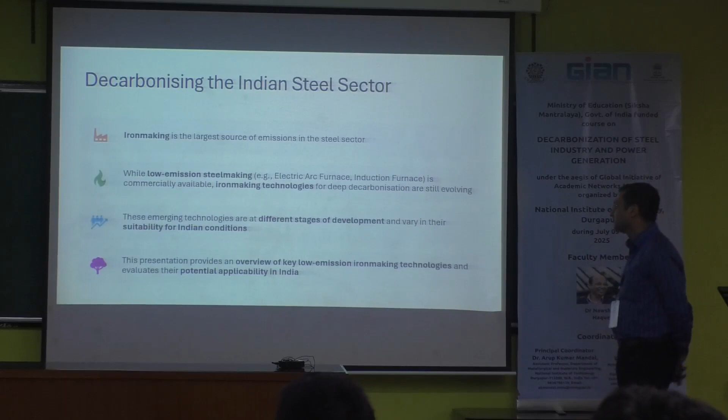In the steel production value chain, iron making is the most emission intensive step. Low emission steel making through electric arc furnaces promises a low emission route using scrap, but low emission iron making technologies are also required. These technologies are at different stages of development—some at very high TRL levels, some low, some at lab scale. In the long term, we can expect a few technologies to develop and become commercially viable. This presentation will give you an overview of these technologies.

Then the Ministry of Steel initiatives—I think we covered this in previous slides in much more detail.

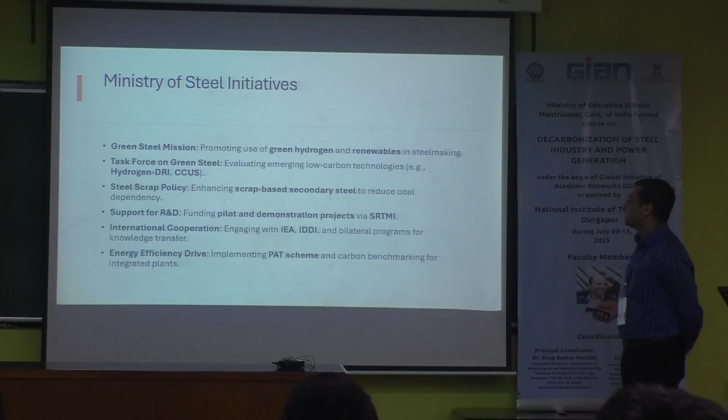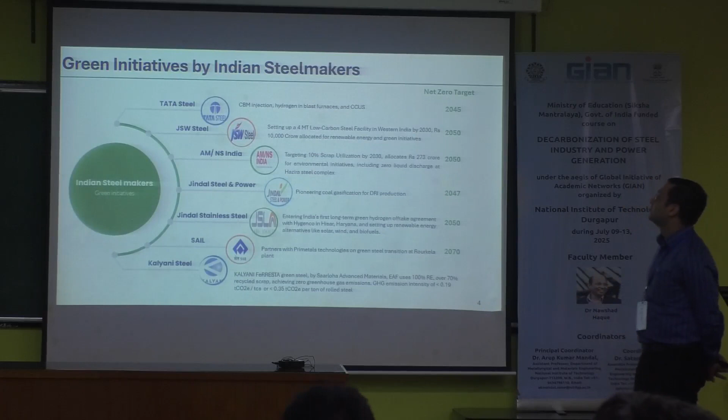There are various initiatives by Indian steel players. Tata Steel: CBM injection, hydrogen blast furnace, net zero target 2045. JSW Steel: 4 million ton low carbon steel facility by 2030, a large allocation to renewable energy, target 2050 as per public domain. AMNS: targeting 10% scrap utilization, 273 crores allocated for environmental initiatives, net zero target 2050. JSPL: coal gasification for DRI production, a unique plant, targeting net zero by 2047.

Jindal Stainless Steel (JSL) has set up the first green hydrogen-based unit at Hisar and is aggressively looking at renewable energies by 2050, aiming to become net zero. SAIL has declared net zero by 2070 as per national targets. Kalyani Steel has made a very low emission intensity steel using scrap and renewable energy—their products are FeRRESTA and FeRRESTA Plus, developed for the international export market, with higher returns.

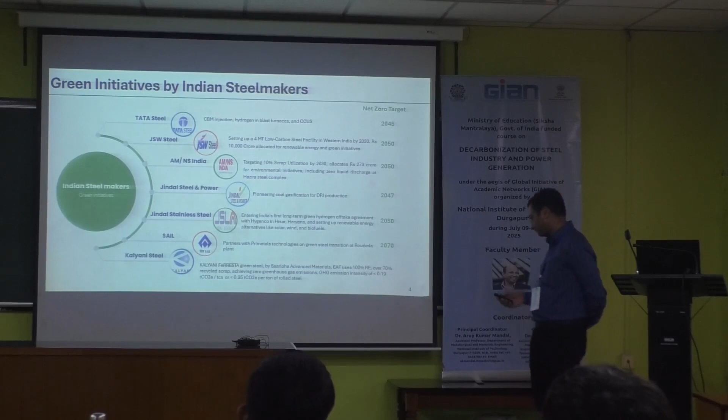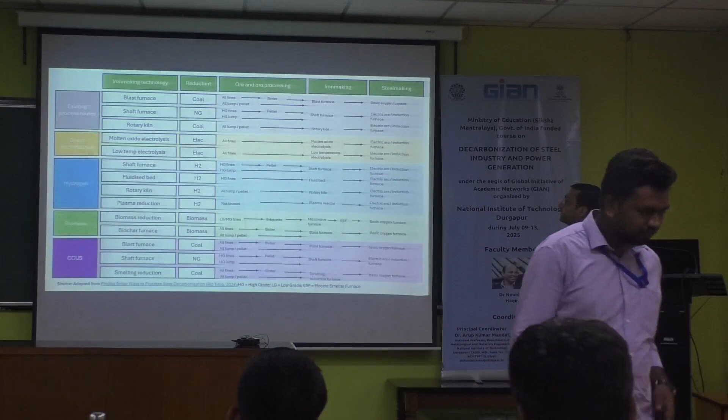This is the summary of the technologies in my presentation. The existing process is blast furnace through shaft furnace, basically natural gas based routes. Rotary kilns, coal-based DRI plants are prominent in the eastern region and in the Bellary region in the south. Then direct electrification—TRL levels are low—molten oxide electrolysis and low temperature electrolysis. Some companies like Electra have developed low temperature electrolysis, but it's not yet at commercial scale. Then hydrogen shaft furnace, fluidized bed, rotary kiln, plasma reduction.

These have been discussed in detail in previous sessions. Biomass based reduction and biochar furnace are at high TRL levels in some countries like Brazil, where they use biochar at large scale for iron and steel production. CCUS has demo scale plants even in India. Shaft furnace based NG—again in India there is an example, JSW owns that. Smelting reduction with coal and CCUS going forward also provides a promising solution for low carbon iron production.

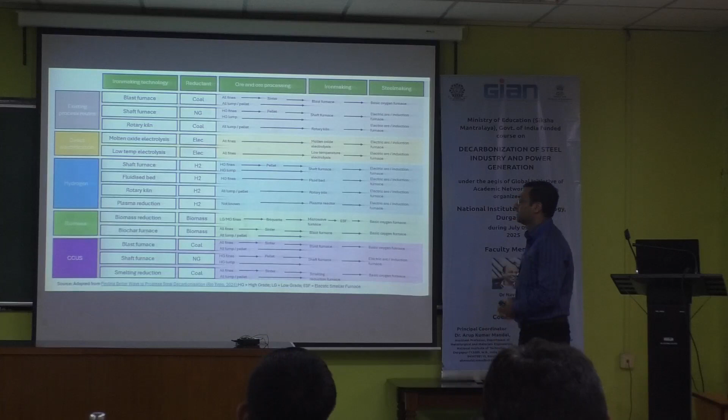Here are the ore and ore processing requirements for these processes. In iron making, what reactors or furnaces are anticipated or being used? Then in steel making, what kind of furnaces will be required—maybe the existing BOF route or electric arc furnaces.

Technology readiness level: concept, initial idea, application formulated, and concept validation. Then small prototype is 4, large prototypes are 5 and 6, demonstration scale is 7 and 8, early adoption is 9 to 10, and mature is 11.

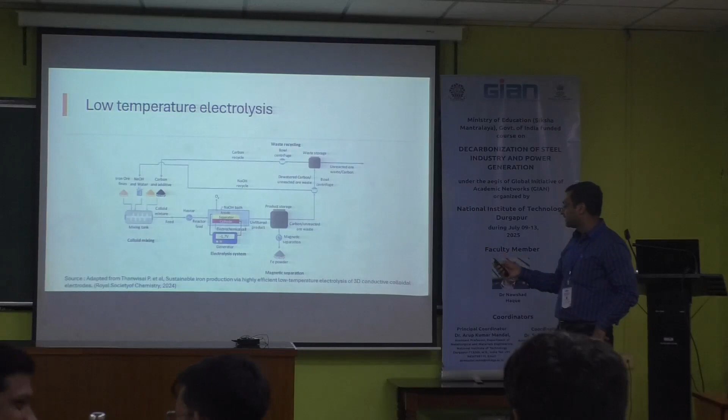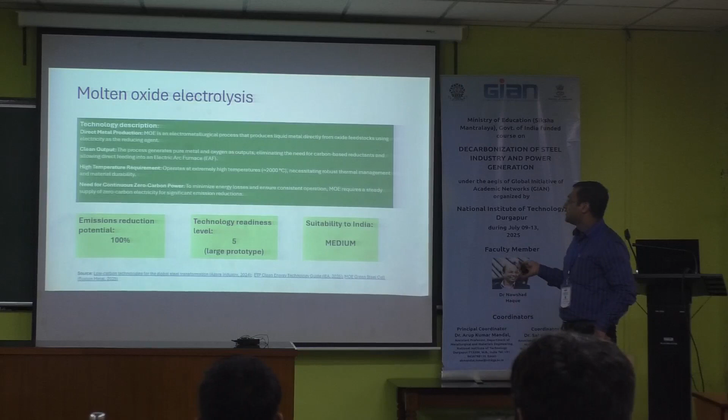Do we need to discuss these? No, not really—these are just for reference. You may see molten oxide electrolysis at TRL 5. Suitability to India is medium because of various factors, scale of production being the main one. Low temperature electrolysis is at early large prototype stage; suitability to India is medium, not that high.

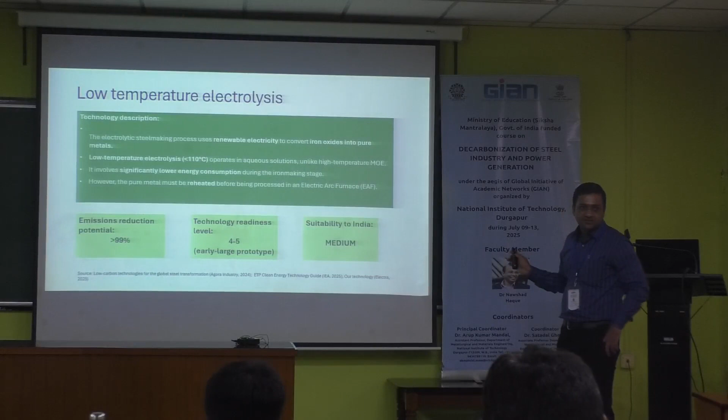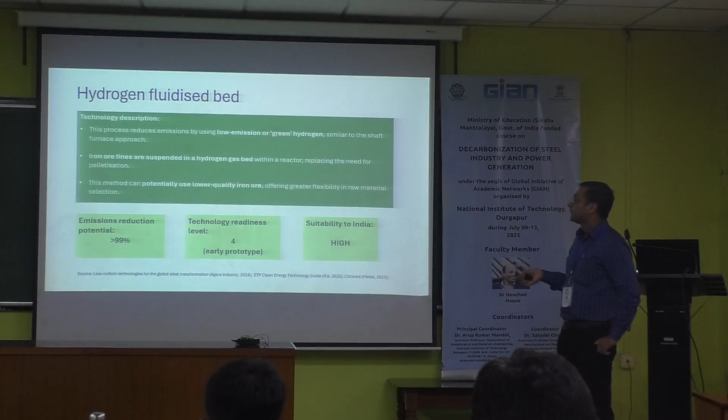Hydrogen shaft furnace—suitability is high considering Indian conditions. Then fluidized bed—suitability is also high, early prototype stage exists, and emission reduction potential is also high.

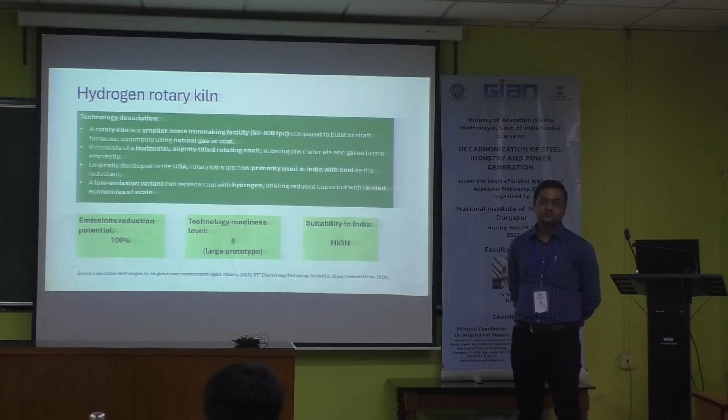Rotary kiln is something new—a new concept especially for replacement of small coal-based DRI units. This small furnace is under implementation in Namibia, and the plant is under commissioning and will start soon. The maximum capacity anticipated for this rotary kiln is 800 TPD, but the existing project I'm talking about is a 50 TPD kiln, and its structure is also different from what we see in general coal-based DRI units. It has a heating mechanism, and then hydrogen is injected—electricity requirement will be higher since you normally heat the raw materials. Suitability is high because it may require low capex and will be suitable for various needs in India.

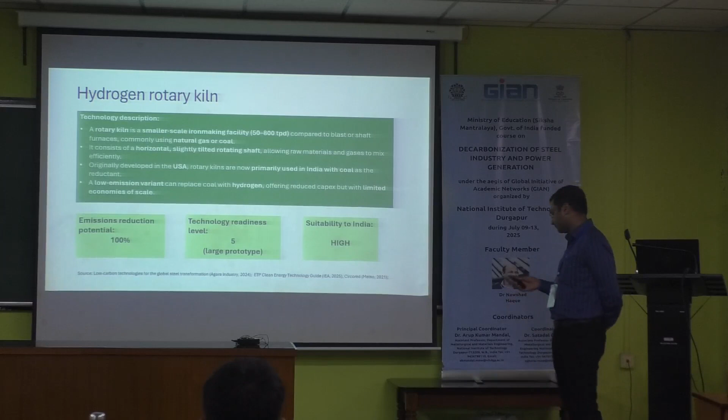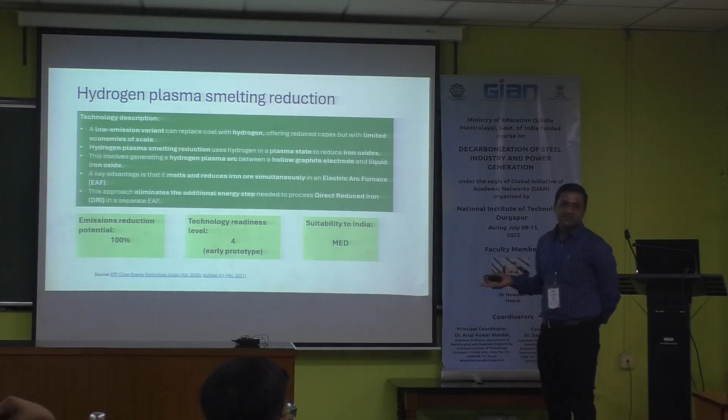Then biomass based reduction. Although we produce a lot of biomass in India, the challenge is getting the aggregation of the biomass and suitability for the steel industry. These are the two main factors. Although power plants also have a mandatory obligation to use biomass, they are not able to meet the requirements, but government is still hopeful of aggregating this biomass and finding suitable biomass for specific industries.

For example, iron and steel requirements may be met by bamboo. But bamboo availability in this region may not be that high, so if we transport it from the northeastern part of the country, the cost will be high. The government is trying to matchmake biomass available in the local region with industry so that it can be available sustainably. That's why suitability is medium.

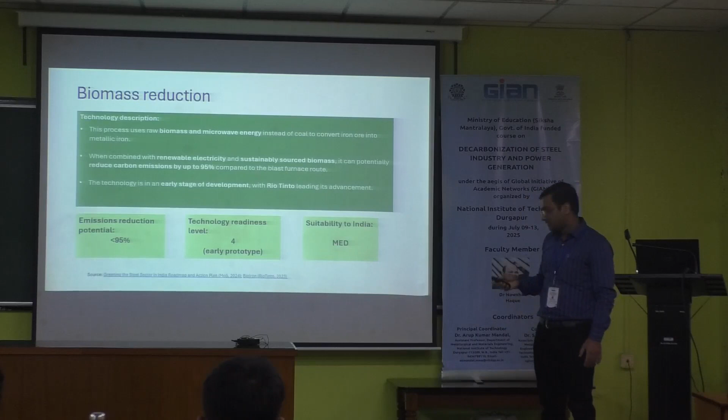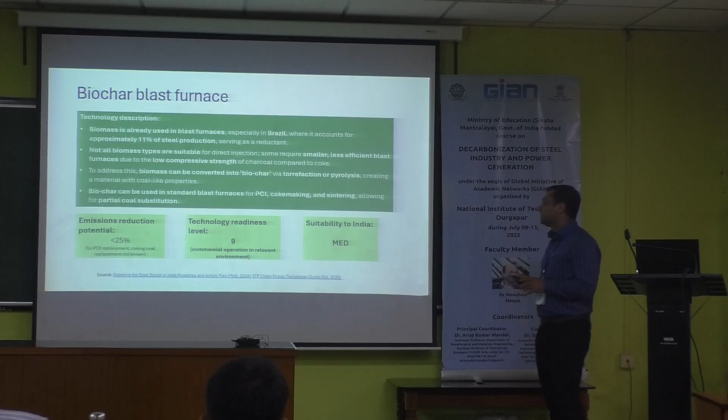But yes, some operations can have biomass as a raw material, and biochar in the blast furnace. Brazil is using a lot of biochar in their small blast furnaces as PCI, as well as a bit of biochar in coke making. Industry experts say some blending can be done in coke making, in PCI, and some coal can be replaced in sintering too. Suitability is medium, technology readiness level is 9.

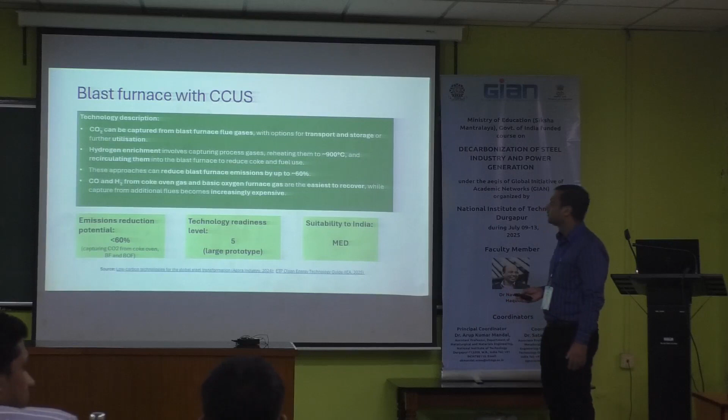We will have to capture, let's say, a blast furnace producing 10,000 tons of hot metal per day. The carbon capture requirement will be huge, and those plants require a lot of energy for capturing carbon. The carbon produced, either in liquid form or as dry ice, keeping it in that state is also difficult. So let's see how things develop.

The 100 tpd or 5 tpd CCU unit in Jamshedpur is not enough. And on the consumption side, we are also not able to match-make CO2 producers with CO2 consumers. Although demand is there, matchmaking is required.

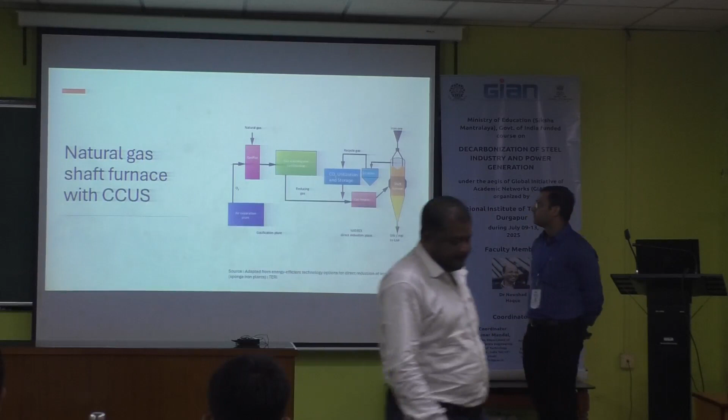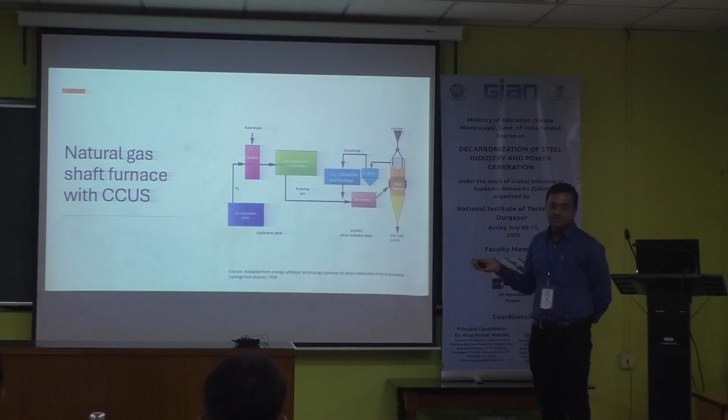The natural gas shaft furnace with CCUS - whatever gas comes out of the shaft furnace can be captured and utilized. I think that's what JSW is doing at the Salem plant. It's about hydrogen, not natural gas, in the existing plant. Okay, the existing plant has already got hydrogen going into HDR. So from where is this carbon captured? There is no carbon capture. There is no carbon emission. We are talking about hydrogen DRI.

In the existing facility, there will be a few more modules added which will make it 4 million. That is fine, sir, but JSW has published that they are capturing 100 tons of CO2 per day, and it is being utilized in beverages. I have no idea. What I know is it's a HYL technology-based plant in which natural gas is used, and CO2 is captured, then bottled and sent to bottling plants for beverage bottling.

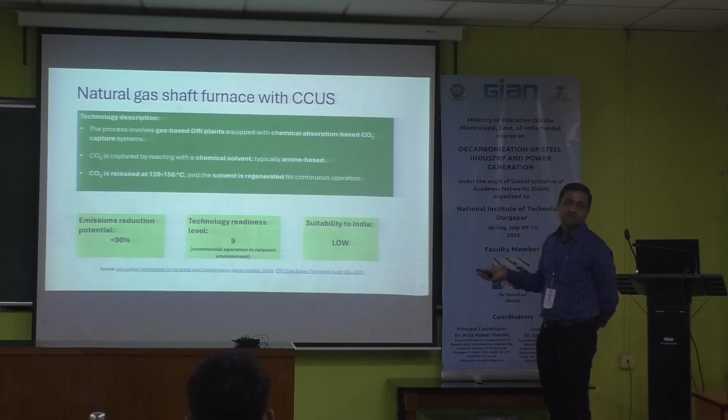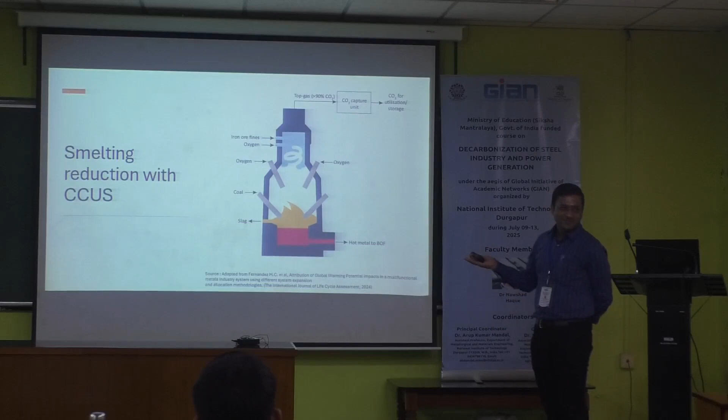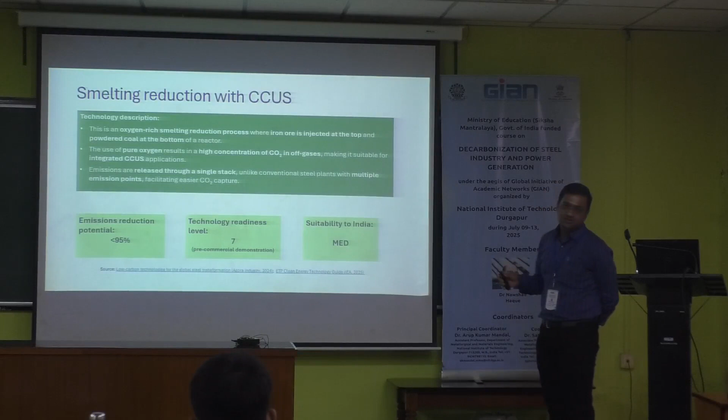Then we have to scale up the priority technologies which have high suitability to India, with mid to long-term R&D focus required. I think the government has taken steps in the right direction, but more incentives or policies are required for enabling this R&D and developing Indian technology. Then electrolysis innovations will be an ultimate step where we can reduce energy consumption, and our challenge of low-grade iron ore will also be catered to by these electrolysis innovations.

Then biomass reduction is a short-term measure, but as we discussed, a lot of effort is required for biomass producing areas and consumption centers. Then CCUS integration needs evaluation - whether it is in favor of the country, in favor of producers or not - that also needs thorough evaluation. That's it from my side. If you have any questions.

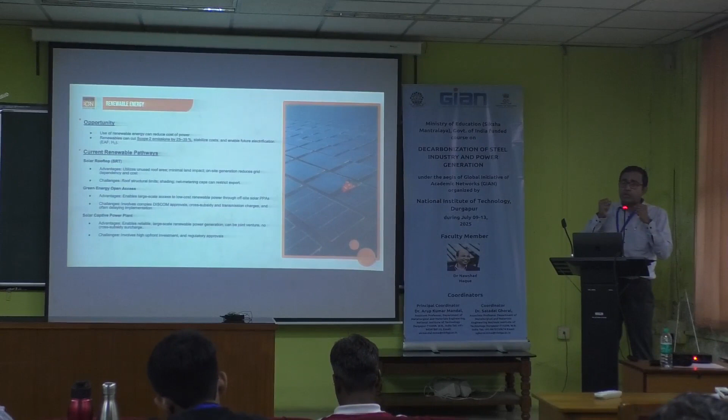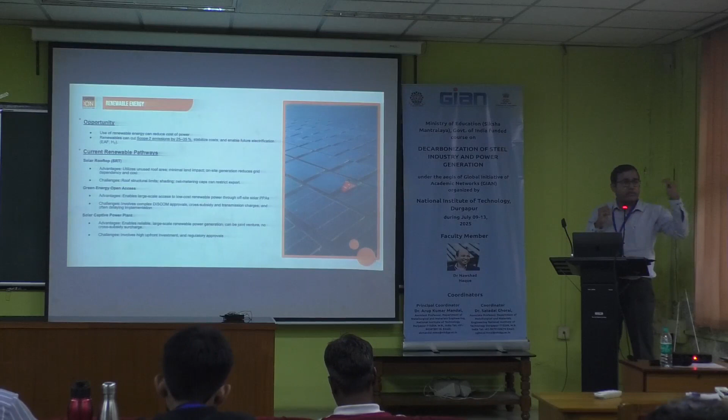But the problem compared to the net metering method, the BTM method, is that if there is extra power generated compared to what you consume at that point of time, you lose that power altogether. In net metering method, that power goes to the grid as if it is banked, and when you need that power, you can draw it back. Here, you lose that power. So comparatively, BTM is not that attractive compared to net metering method.

So overall, problems related to renewable energy today are: the net metering method is not very standardized. For solar rooftop, as well as for captive, as well as for behind the meter, it's capital intensive. Then there might be site constraints, roof space, land space that might be constrained. There may be shading problems. Then, in any case, you need a grid backup, because at night you need grid power, and whenever there is fluctuation you need grid power, and that backup has a cost.

Then there are technical gaps, because in the steel industry, the employees and specialists over there are experts on steel, not on power. So that knowledge gap comes in, but of course one can outsource the entire work - that will also have a little bit of cost.

In this case, one needs to look also at the ESCO model, wherein the third party invests for the renewable energy, and on the basis of savings, whatever is the saving, it's shared between the two parties - a win-win model. It's working in some areas but not very popular because of the related risks for the ESCOs, but if it works out, it's a very good model to look at.

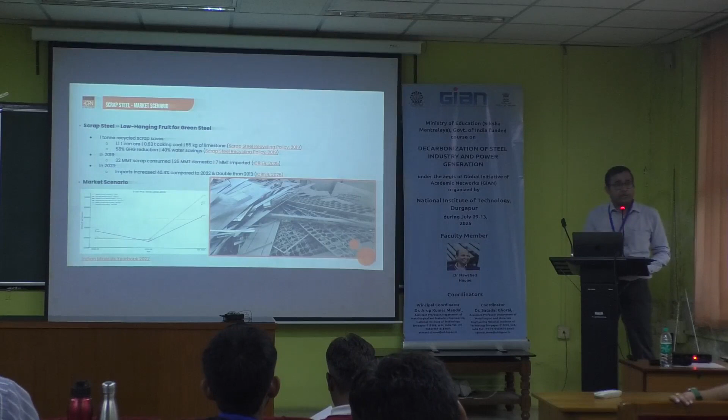Also, the scrap gets mixed up - segregation at source doesn't happen properly. As a result, we were talking to some MSME industries, and they're saying the scrap quality is so variant that they do not have much control over the output quality of the steel. So at source, quality control is required, which is very difficult in the informal market. But how to bring it to the formal market, we'll talk about it.

So the challenge is scrap - limited availability, weak formal markets, and quality inconsistency. On the demand side, MSME players or any other player does not get quality assurance. We have seen very limited linkages between the formal ELV market and the MSME industries, and price volatility is there.

Now, the policy landscape was also discussed earlier: national steel policy, steel scrap policy, and vehicle scrapping policy. These policies are there at the national scale, and some states have also brought in specific policies. It is extremely important to actually implement this, so that if there is a mandate that after 15 years a vehicle has to be scrapped, then it will actually get scrapped, and that scrap comes into the steel market.

And then the advantage of a formal market - be it labor conditions, be it environmental advantage - that can be taken care of, along with segregation of scrap at source itself, and the steel players will get better quality, defined quality scrap. So that's in brief, as I'm not getting into further details, and most of it was discussed earlier also.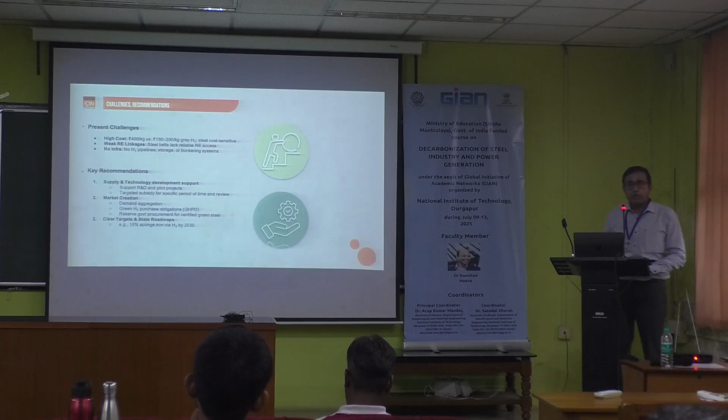So the procurement process and demand aggregation have driven it down. LED light at some point of time was costing high, but once EESL brought in the demand aggregation of LED lights, today we all are using LED lights so happily and the cost has gone down. So demand aggregation is needed at a scale. If we procure hydrogen, it will also help in reducing the cost, in addition to improvement in technology both at the renewable side as well as the electrolyzer side.

So in short, I will not repeat something which has been stated earlier. Now, energy efficiency - for an MSME industry, energy efficiency is a low-hanging fruit. Interestingly, not much is happening over there. That's not the case with large industries; they have their own capabilities, technical experts who are analyzing, advising, and taking action. But at the MSME scale, unfortunately, this is not happening. Both on the electricity side as well as on the heat side, there are inefficiencies.

Some of these initiatives were discussed in the previous presentation. There might be some reasons - one reason is that for MSMEs to make an investment is actually very difficult for most of them. That's the idea we get from them, because if you invest, you need the money back, and for them to bring in that money, to get into that risk mode is not that easy.

But then we have to get low cost finance, and we need to have a mindset and clarity that whatever money we save is a saving, and there is no need to pass on that money to the consumers. So MSME players can do a lot in this regard with respect to energy efficiency. We at Switch On are happy to help them - if any of your contacts want support in terms of energy audit and advice, TERI is also working on it. We can support such industries.

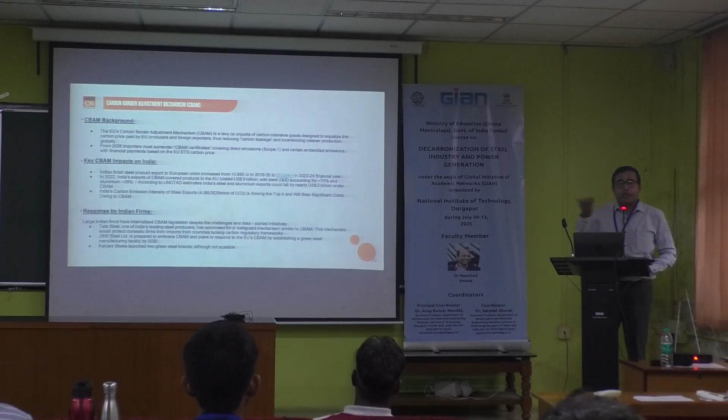I'm sure all those points have been discussed, so that's it, since I'm not repeating points which have already been discussed. End of the day, we are also running late, but at this stage, questions please.

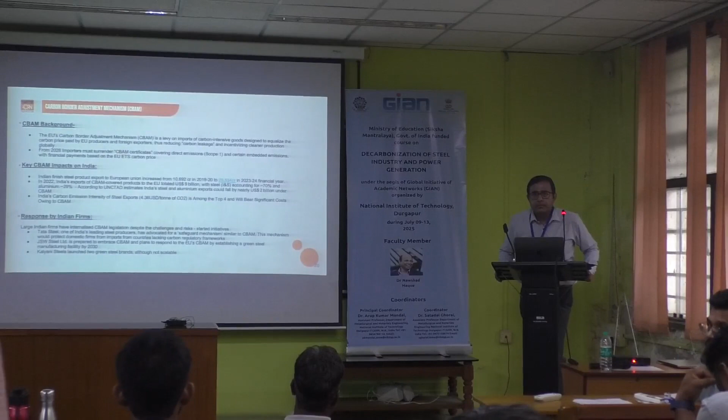Yes, I have just one question. I'm from JSW. We have been exporting our steel to Italy, and there has been communication from Italy saying you need to get certified on CBAM - show me your ISO 14064 or something. So we have been working on it; we are also a responsible steel certified company.

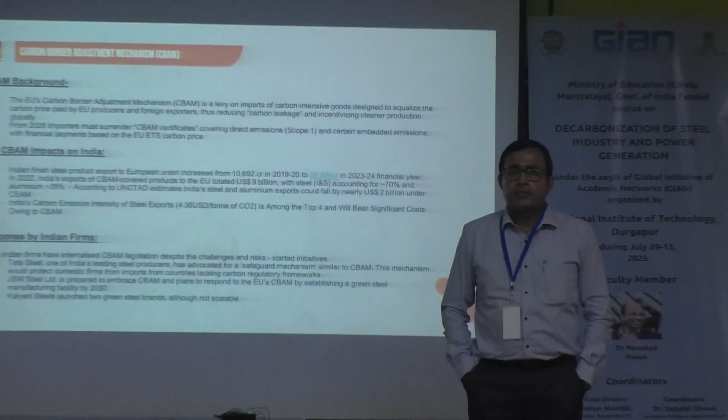This responsible steel certification is not helping me in any way. At least Italy should have listened that yes, these are responsible steel manufacturers, we can accept their product. They are still bent on imposing 3% tax. So now they are saying 14% tax, 6% tax.

I mean, it's so haphazard. There is no regulation and nobody is going to help us. So we are lone players. So any advice on that, please? See, as a country, our position is very clear.

You have seen that BRICS statement, and it has been very clearly stated that this is discriminatory. And if somebody, a powerful person, takes a discriminatory stand, arguments and logic don't work. Now of course, there would be two-pronged action. One, diplomacy will have to work to the extent they can drive it down or push it down, because there would be retaliatory tariffs, there will be those fights.

That is one area. In the other part, whatever they are asking you to do to get satisfied, there is hardly any other way than to actually comply. So we end up paying the tax at that time. But in any case, overall reduction, low carbon is a necessity in many other ways. So we have to continue working and reduce our carbon content, keeping the cost low.

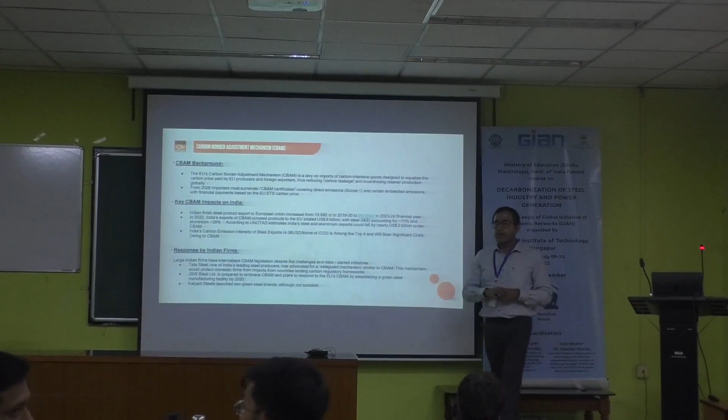What is the current scenario of carbon capture in India? Do you have any data on different states and how much they are doing currently? At this stage it is happening at a kind of pilot scale, and it is very expensive currently. Overall it's expensive. JSPL claims they have a 2,000 or 3,000 tpd carbon capturing unit in their plant, but there are no takers for the CO2.

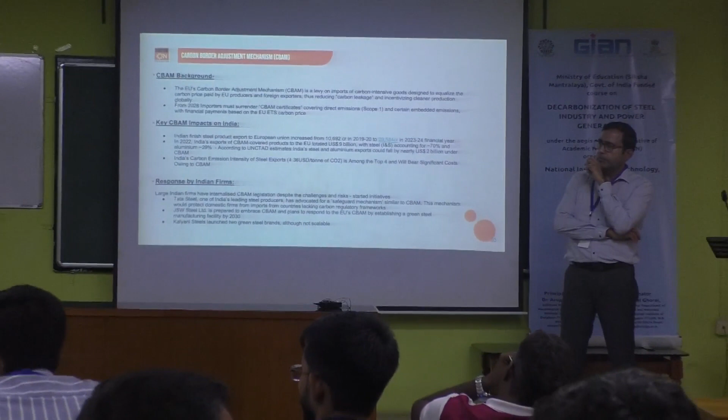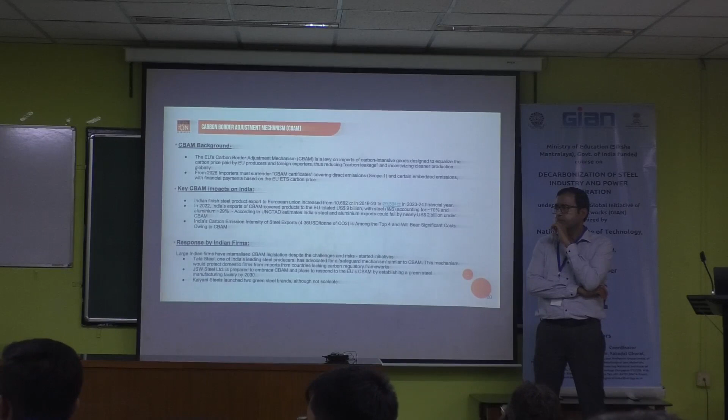Nobody is buying it. They are not able to generate products from it, so they have a functional plant but they are not using it fully, due to JSPL's situation. I'm not aware of what Tata Steel is doing with their plant, but JSPL has the plant ready though not fully operational.

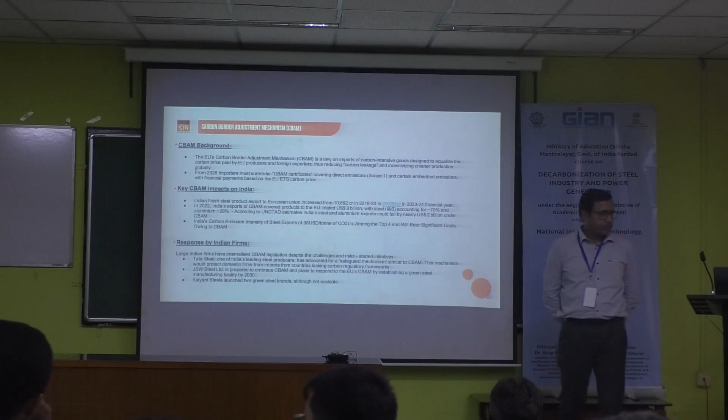Technology is required. The fertilizer plants are already optimized for the current configuration, but when new fertilizer plants come up with green ammonia as an option for intake, then CO2 will be required. It's a future solution.

Maybe Tata Steel is converting to ethanol. Yeah, maybe, but the point is the ethanol cost is very low. The capturing is very expensive, but the cost of ethanol is very less, so if they sell it, they will not get profit.